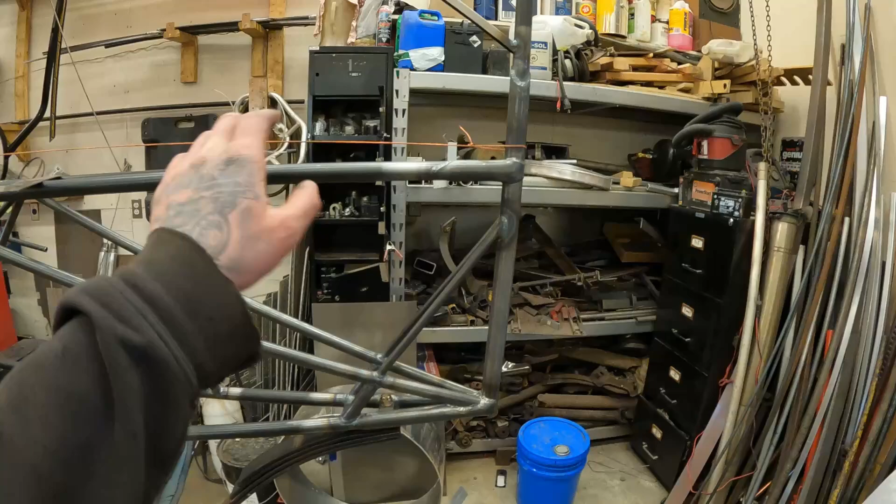As you can see, there's a bit of stuff done with the tail. I finished up tying in the longerons to the tail post. That was only tacked before, and I did it wrong. These tubes touch and are welded together, and I tied in the longerons to the tail post like you would with any other junction. That's not correct - there's actually supposed to be a gap right up to the tail post here, which gives clearance for your elevator horn.

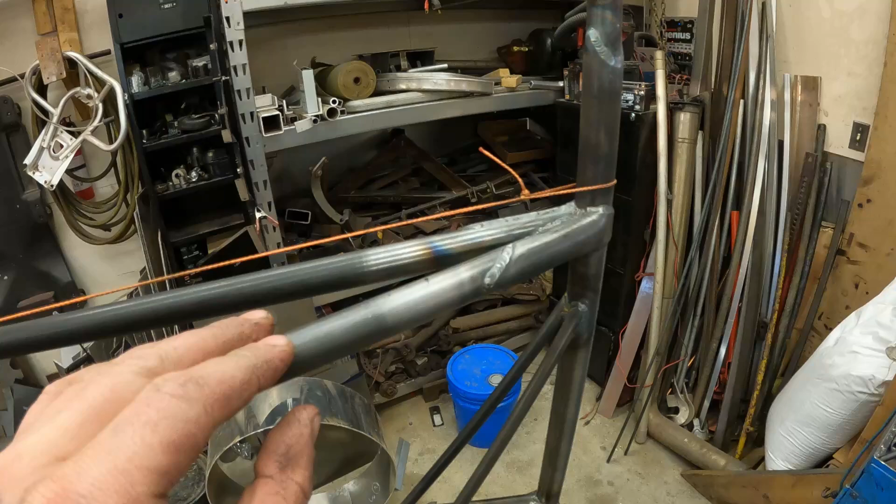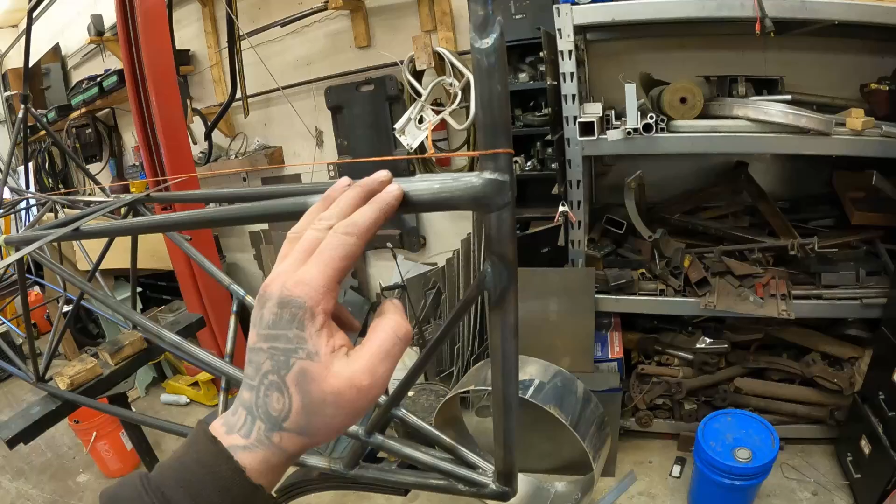So that was the first screw up, and the way the tubes terminated here, I didn't really like how they were going to blend in. So I ended up putting some doublers on here, as you can see. They're just I think 7/8 tube, whatever fits over 3/4 tube for diameter and wall thickness. So I ended up putting in some doublers to tie it in better with the tail post, so that's all good now. The bottom was twofold, so the top was strictly for that.

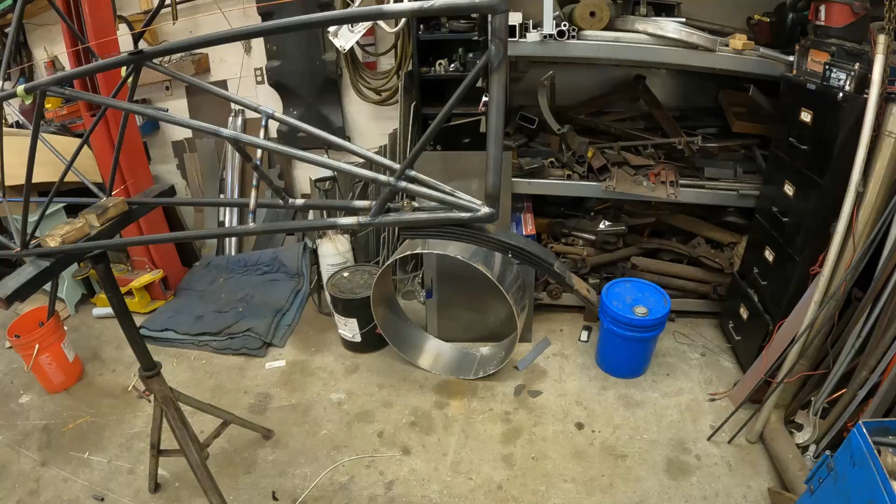The bottom, I omitted the liners. There's a liner that goes inside the tube right around here, and that stiffens everything up for this tail spring. There's still a bracket to go here, but the liner stiffens it up for your tail spring so you don't bend up your longerons. I omitted it on purpose because originally I was going to build this kind of elaborate swing arm system to mount roughly around here, and I was going to come out and have a gas shock in here and all that, but I think I'm just going to run a tail spring.

Not this 4-leaf, I'll be running a 3-leaf. I just had that one laying around in my parts inventory. The 3 spring is currently on the PA-12, and the PA-12 is on skis. So I'm going back to the original. I'm probably going to end up either buying a T3 or building something along those lines if I can find a suitable shock the right size, which I probably won't, so I'll probably end up buying one.

So with the liners left out, it was either cut everything off for the tail post or double it up on the outside, which is what I done. Same thing, there's a liner or doubler up to this station here where your flying wires attach, so I got that all doubled up. I finish welded the 2 longeron to tail post joints, because getting in here is a pain in the butt, especially when your longerons are too close together like mine. But it's done, so it's not impossible, just hard.

So then when that was done, I cut and fitted the square tubing for the tail spring. And it's not just a hole drilled through - I did put a piece of 1/2 inch by 0.058 wall, I think it is, pretty sure that's the one with the 3/8 inside diameter. So there's a piece of that in there. It's TIG welded in and then just ground flush.

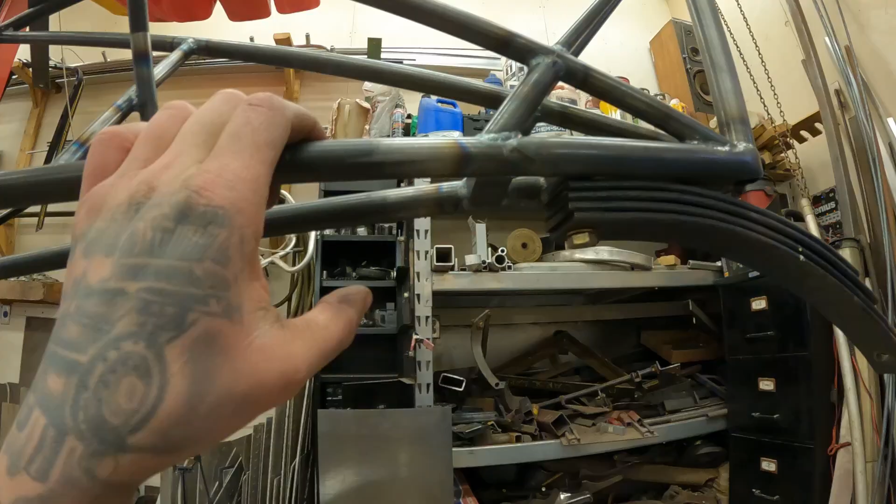And ahead here, the plans call for a piece of round tubing. I went ahead and used the same 3/4 stock, seeing I was working with it anyway. So now the bottom is flush, so you've got a nice spot to weld your flying wires. And as for the flying wire tabs, I should say, it's not the actual wires. It's on, what page is that?

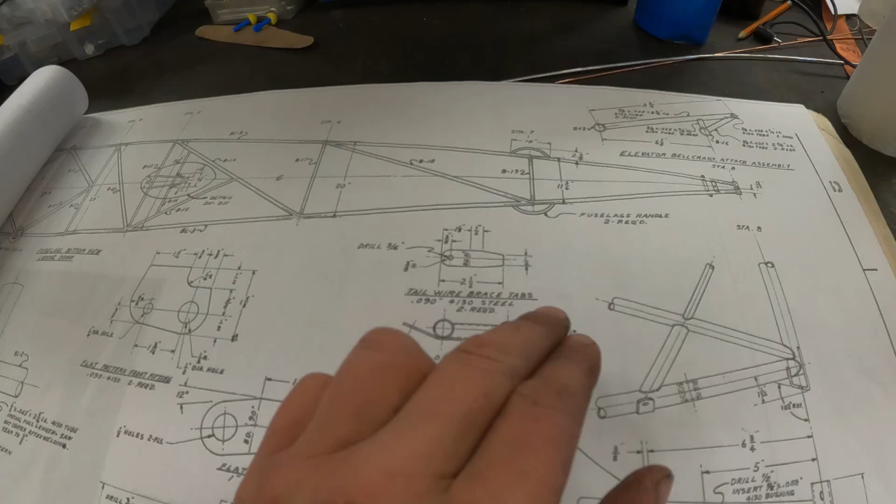Right here. So yeah, they're saying to do this - cut it out of 090 and put 2 tapered ends on.

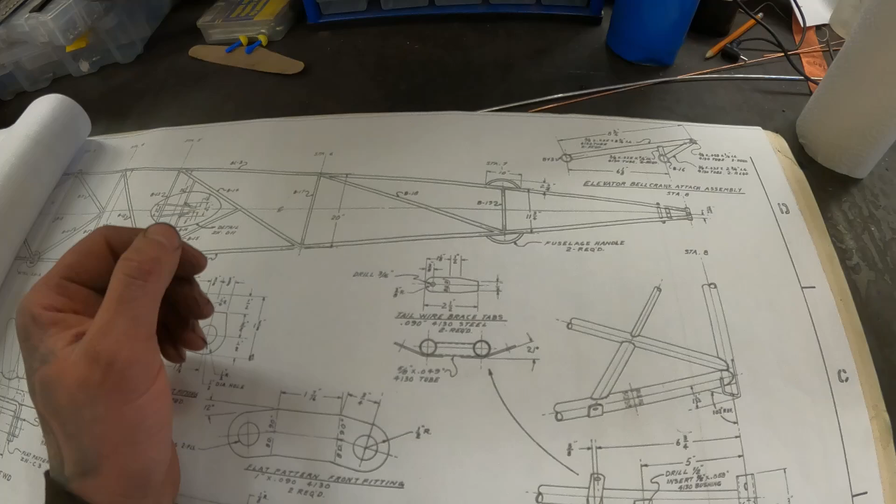Somewhere along the way, Piper did something similar to this. I don't know the full history, so if I screw something up here, it's not my fault. I don't know. But yeah, somewhere along the way they did do something like this.

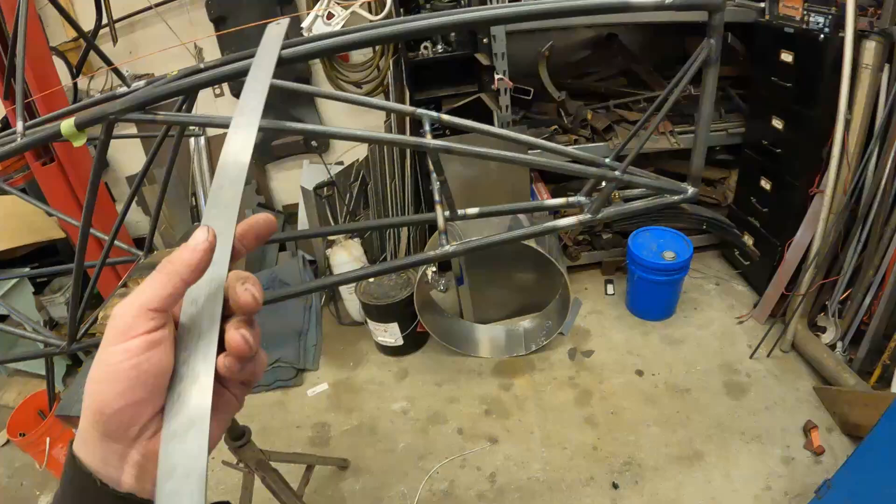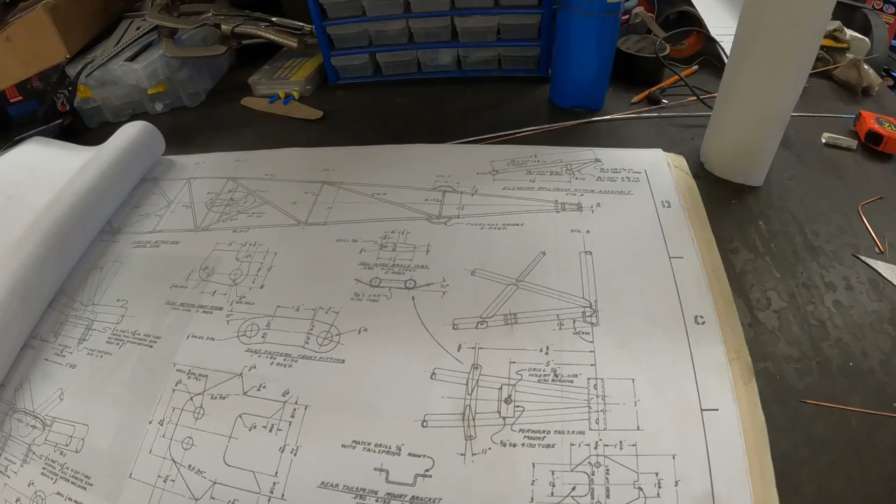And someone at some point in the factory decided they were going to weld in right here. So for example, say that was that tab, they welded in here, and that was an AD for sure. So do not do that. If you do two separate tabs, only weld here and here and across the back. If you want, you can honestly probably leave that out, but do not weld in there. So that for sure was an AD.

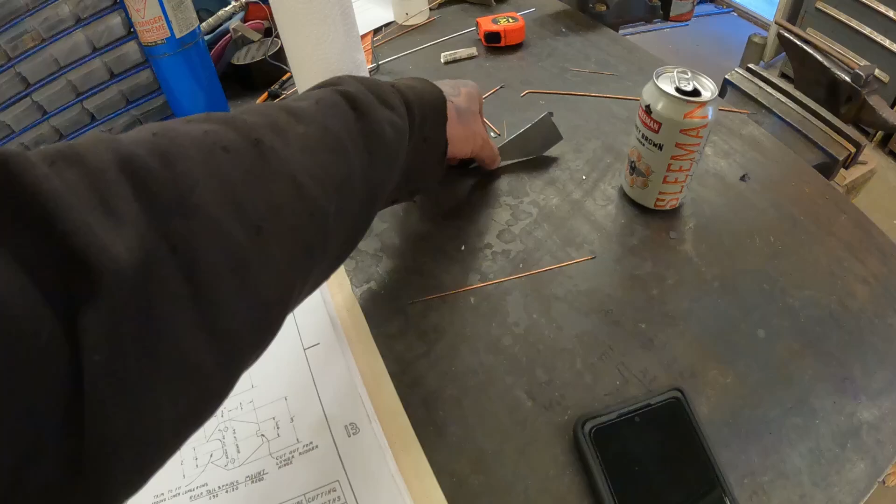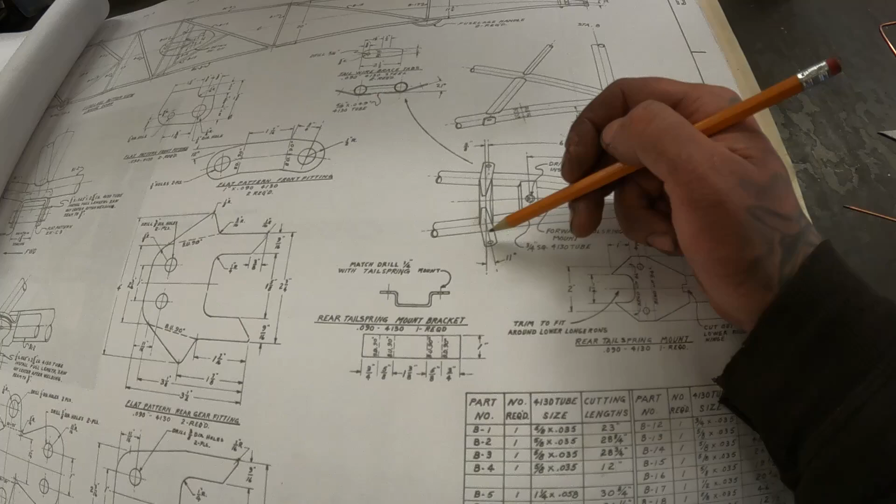And I think somewhere along the way they might have just butted the tab up against the tubing like that. Maybe, I'm not 100% sure on that one, but the general consensus now is the best thing to do, instead of doing this, is make a tab or make a strap instead of two tabs. They just go straight along. So cut out one piece, figure out whatever this angle is - 11 degrees - and weld the two sides. Do not weld in there like I was saying, and you should be all good.

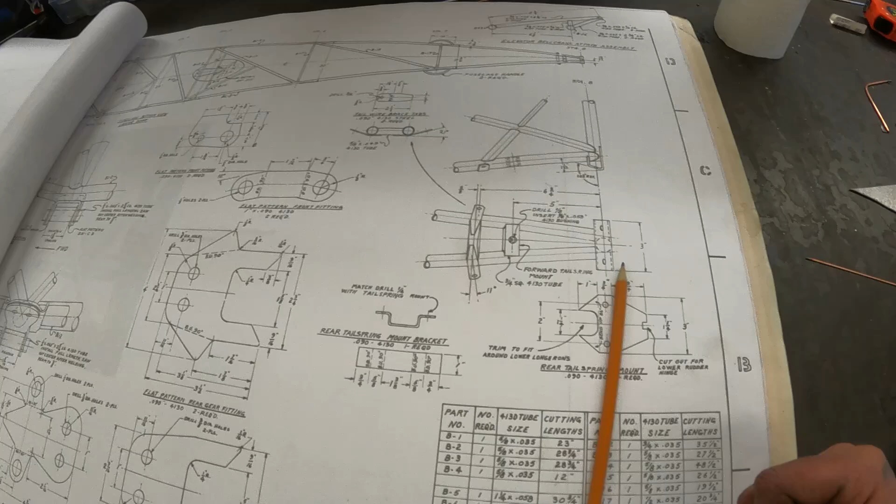And these are per plans, that's per plans. This is an Alaska thing, I guess you'd call it. That's where it originated. But that's the tail X brace.

They also do a box, so the box, you got a tube across, a tube up. And the tube across the top here is actually not in line, it's down here a bit. I'm pretty sure that's for elevator cable clearance. So I like X's - X's are geometrically stronger than squares, so I just went with X.

And as for where to put it, the top here is mid-span of this diagonal. If I remember right, this was a while ago that I welded this in, since I'm making this video. And for the bottom location, the bottom is square to the lower longeron. So square and halfway - that's where it ended up.

So that's that, and I went ahead and finally welded in the vertical stabilizer. Normally it's bolted in - they put the bolt through here, but then you got a bolt head to contend with when you're doing your fabric. And realistically, if you bend this up, chances are that means you put your plane on its back, and you're in for a whole lot more work than you would really want.

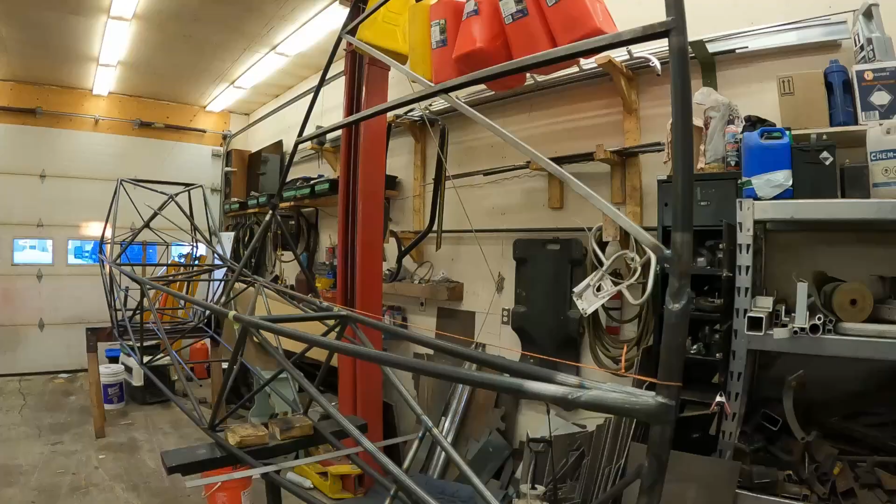So the time savings of having one bolt here versus this weld, when you got to make all this new anyways, it's not worth worrying about. So same thing, I cut it at 30 degrees, welded in, same as you would with like a splice or something.

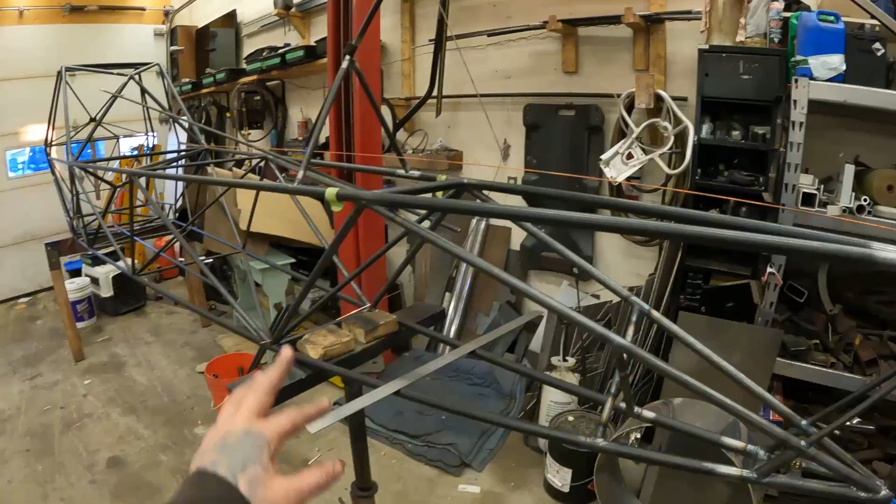So on the topic of that, the aft to the front is straight per se - it runs down the center line of the plane. So that's the datum line here. It's not in the correct place up and down - well, the front it is, but the back here, I just moved it up and down to kind of line it up with this leading edge.

And I'm not running a jack post because I'm running a linear actuator trim. And I extended my leading edge and made this whole thing bigger, which is in another video.

To anchor the front, this is what I got - it's just two more 3/8 tubes, same as the front leading edge there. So that'll be that.

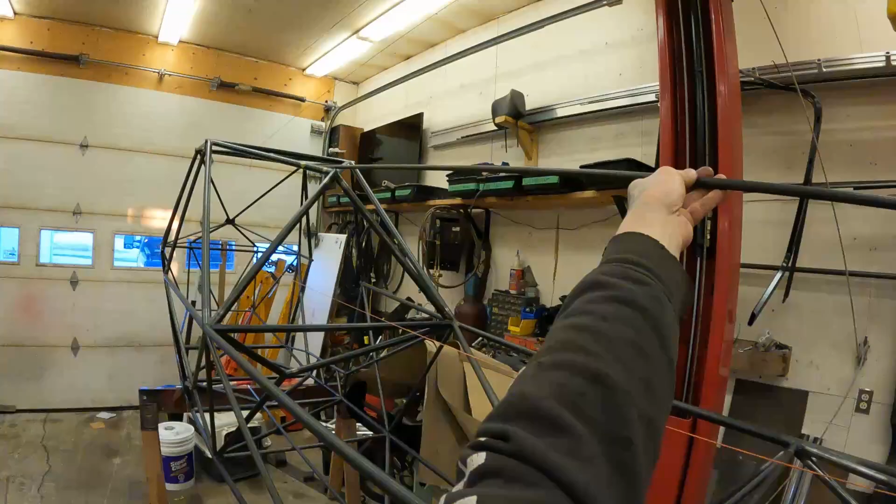This will be my top stringer, so that's going to weld in right around there too, and it's going to attach there. Once all the turtle decks are in, that'll give it some support, and that'll help it with the fore and aft, even though it really doesn't need it - it's pretty stout where it's at. And this is only tacked just because I don't know if this is going to interfere with something else.

So until I know for sure this is good, it's getting tacked. And the top - like I said, the bottom straight in line, the top not straight in line. The top tie strings off to the back rudder post there, and it goes right up to the forward spar carry through, and up here it's not on center, as you can see - or can't see, I don't know - but it's to the left if you're sitting in it.

I've looked and found measurements anywhere from 1 inch to 2 inches to 2.5 inches. So right now I believe that one is 1.5 inches, I think is the measurement I went with. And you can adjust that after, it's not set in stone.

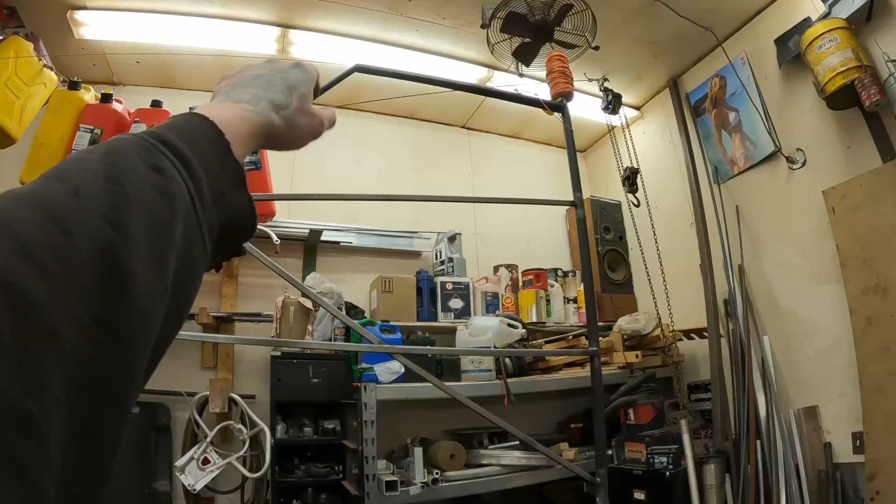If you find you're holding a little bit of right rudder or left rudder, you literally just come back here after it's covered and everything else, and you grab this and you can just bend it and flex it, which is what I had to do to set this, because it's built flat.

So if you put it straight in line down here, it's going to be straight in line up there. So after it was in, I put the string in and just grab two hands, one hand there, and you pull back and set the twist so it lines up with the line like it is there now.

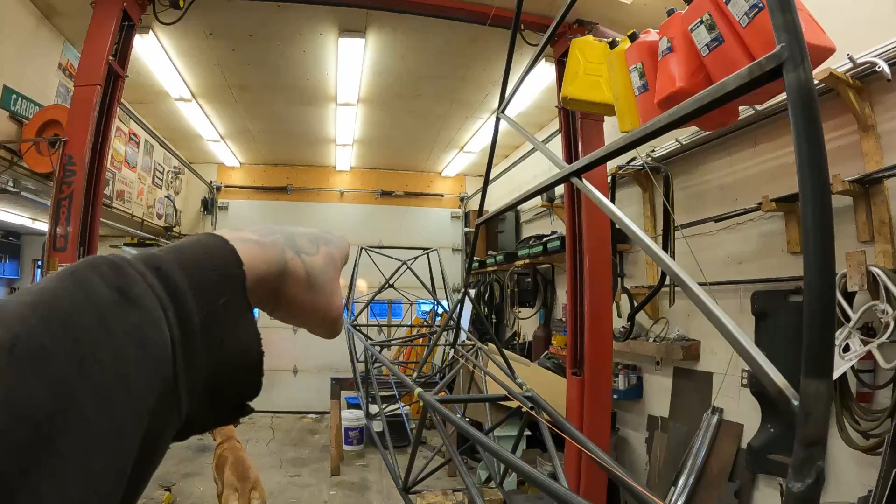If you can see it, I think it's kind of blending in with the gas cans up there. Maybe this way you can see it, I don't know. But anyways, it's not rocket science - put the line up 1.5 inches over up there, tie it off back here, and bend it and make it look correct.

So that's - the vertical stabilizer is in. And what else did I do?

Oh yeah, the other night, came out after work like I am here now, and I cut and welded in the three gussets there for the front tube section. I don't know what you call this particular cluster, if it even has a name, but they were quick and easy to do, so I done them. But yeah, that's where we're at.

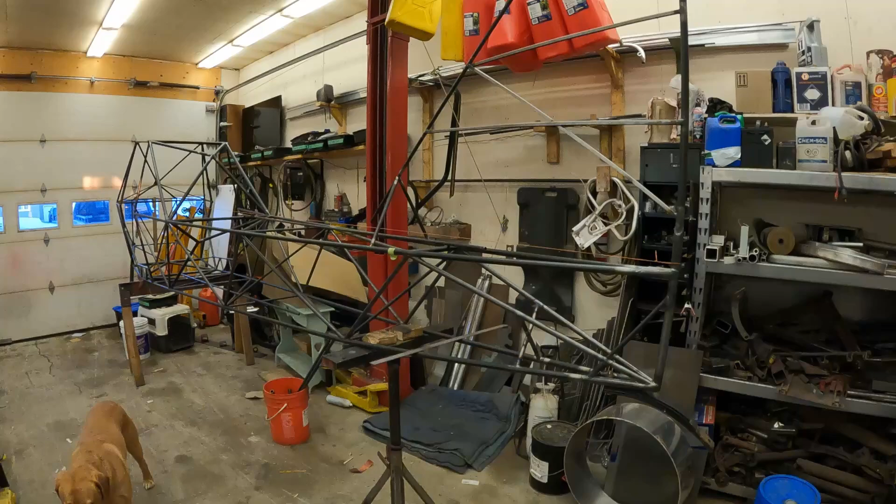I have made progress. I haven't given up on it. I'm hopefully gonna be putting a lot more time into this now. I've made a point to keep it here in my way so I don't bring anything else in, and whenever I can, I come out and either work on it or start coming up with a plan.

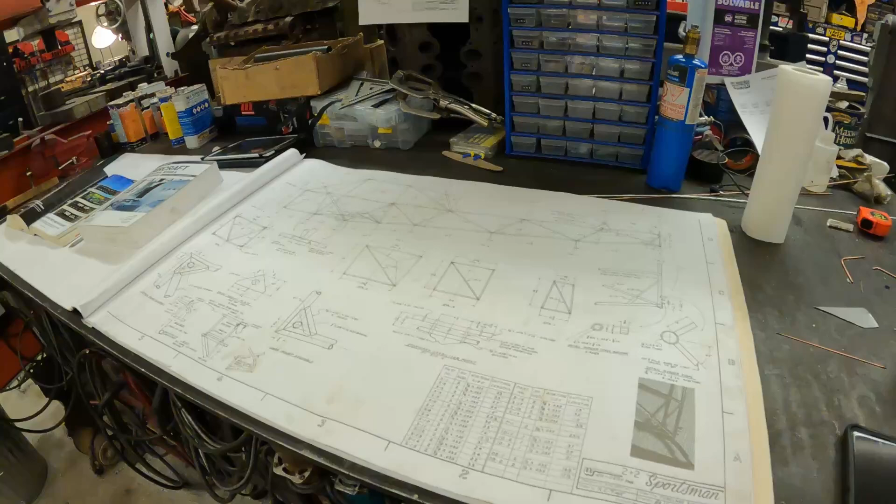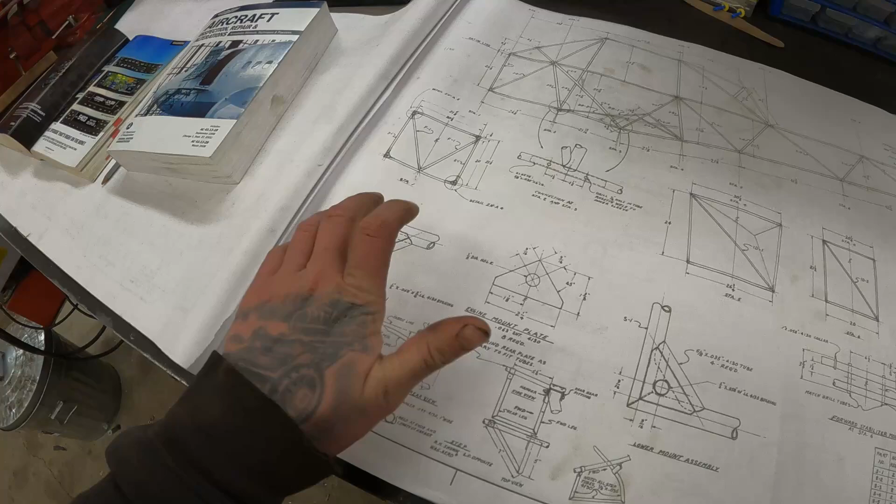How I'm gonna progress on this now is, I think I'm gonna start making brackets and knock some of that stuff out, because there's really not a lot of tube work left. I can do the motor mount braces and stuff like that, but I don't want to tackle any of that until I have a motor mount to use as a jig, because I really don't want to weld this stuff in and then find out the bolt holes don't line up or they're a little squished or whatever.

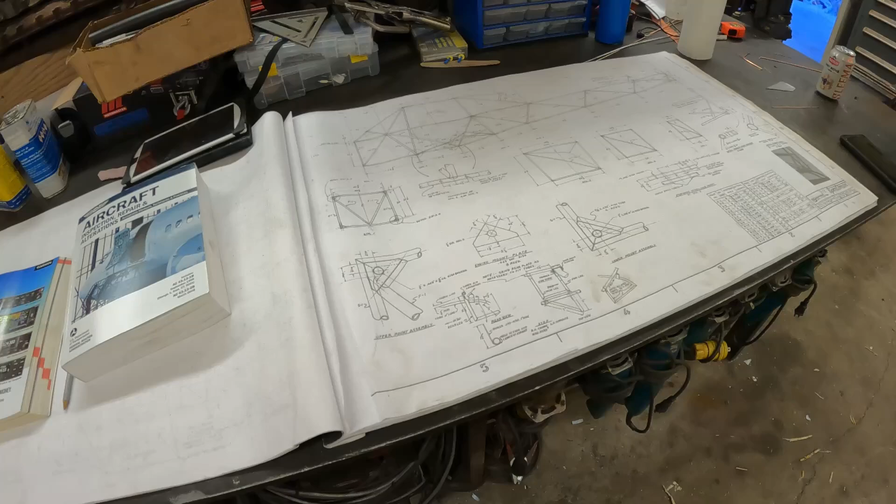So that's not getting handled until I have a motor mount, and the motor mount is currently holding the engine on my PA-12, which this should be the last summer for her if all goes well.

So the PA-12 is on year 36. Yeah, 36 years on the fabric. It was done in 1989. So it's still in good shape. It does test good, it's airworthy, but the paint is starting to show its age.

Willie, get down. The paint is starting to show its age, and it's either put time and money into the PA-12 or hang up her hat. Well, she's still going good and had a good run, so before something happens to it, I'm gonna retire the old girl.

I thought about selling it. If I sell it the way it is, I'm not gonna get no money with the thing needing fabric and knowing what's underneath the fabric. And I agree with them, rightfully so.

In the state it's in, I wouldn't pay a whole lot of money for it, because everybody that knows Pipers knows when you pull the fabric off that's been on for that long, especially on a float plane, you're gonna find corrosion, you're gonna find this, you're gonna find that, and you'd be dumb not to fix it when you got the fabric off. So it's a project, and with that, I don't want to get into that.